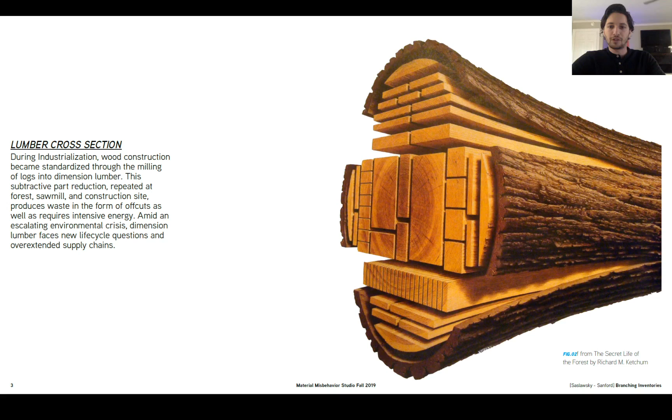During industrialization, wood construction became standardized through the milling of logs into dimensional lumber. This subtractive part reduction, repeated at forest, sawmill, and construction site, produces waste in the form of offcuts as well as requires intensive energy use. Amid an escalating environmental crisis, dimension lumber faces new life cycle questions and overextended supply chains.

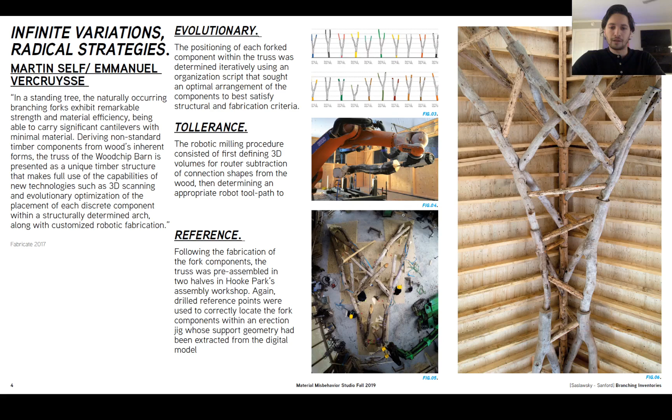The potential of computational imaging, 3D scanning, and fabricating non-standard timber have been both explored and demonstrated in built projects such as the AA Hooke Park over the last several years. Most of this work relies on elaborate and cost-prohibitive 3D scanning and robotic fabrication. This paper describes a democratized take on such approaches, developing a novel construction methodology which reimagines the utility of raw logs using computational feedback to place natural form in dialogue with design intent.

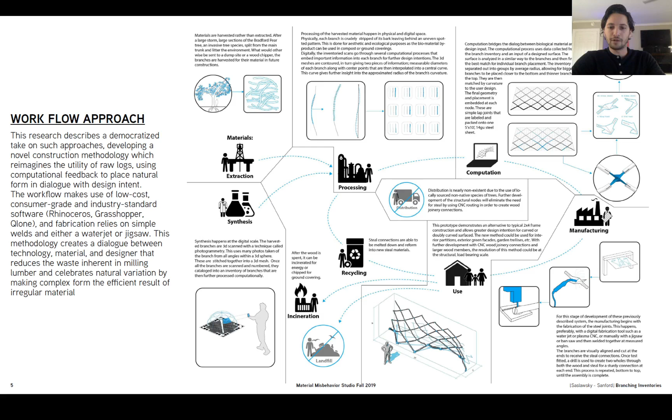Because material eccentricity informs design geometry, minimal part reduction must be performed, in turn decreasing construction energy and waste during harvesting, production, and on-site construction. The workflow is demonstrated through the construction of a full-scale structural prototype, a wall that is 25 feet in length and 9 feet in height.

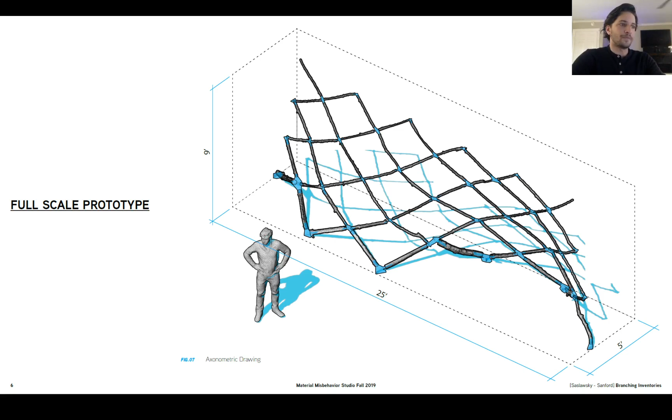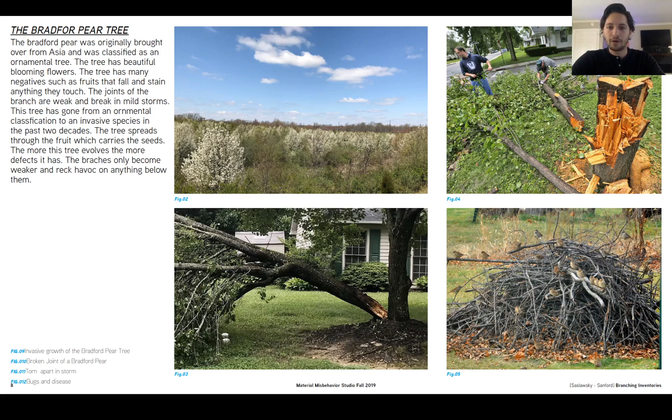Invasive plant species, specifically the Bradford pear, which is invasive to the region in which the research was performed, are explored as a natural material stream for construction, attempting to incentivize the removal of such species and in turn, the remediation of the environment at the regional scale. The Bradford pear, which was popularized in yards and parking lots due to its natural ornament and fast growth, is prone to losing branches due to its weak, acutely angled forks and numerous limbs originating from the same point. The built prototype collects and makes use of these fallen branches.

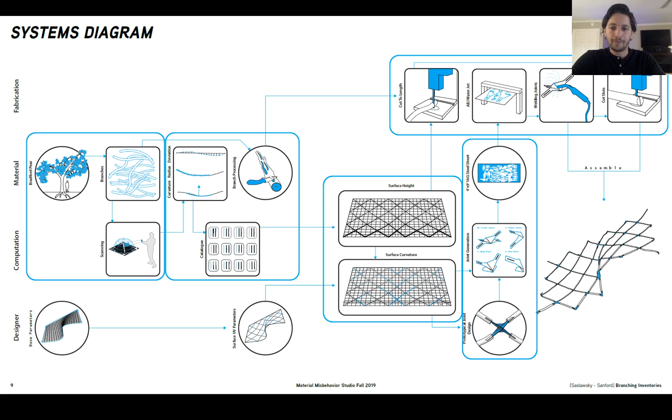Branching inventory develops a hybrid analog/digital workflow from which many types of structures can be designed and built, which will vary in form according to material input and design intent. Seen on this page is the systems diagram which mediates designer, material, computation, and physical fabrication. The methodology is described in 5 main steps: collection and scanning, inventory and analysis, branch and surface sorting, programming joints, and physical assembly.

To extract physical qualities from the irregular material which can inform a design, a reliable 3D scanning method was required. Several 3D scanning methods were tested, from consumer-grade smartphone apps to high-end industrial 3D scanning hardware and software. Ultimately, a user-friendly smartphone app, Qlone, was selected. Qlone is a photogrammetry scanning software that uses a printed calibration grid as the surface on which an object is scanned. The surface can be printed at any scale and isolates the digital model from all background material, meaning that no post-processing of the resulting digital mesh is required.

An augmented dome is viewable around the object as it is scanned to direct the user to views and angles yet to be photographed. The use of a smartphone app democratizes the approach, replacing 3D scanners, which retail for tens of thousands of dollars, with software that costs a few dollars.

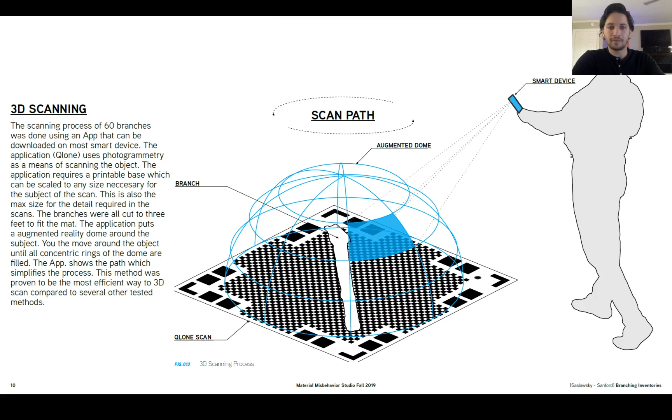This step of the process functions as the digital link between designer and material. First, the inventory is prepared for analysis with the goal of extracting specific understandings of the branch's inherent eccentricities, such that it can be used to the designer's advantage. The first operation performed on each 3D mesh was a simple contouring along the length of the branch that serves as a base for many other operations.

Connecting the centroids of these curves results in a crude interpolated curve representing the center line of the branch, a spatial delineation that can be further refined by interpolating circles over each contoured section, in effect smoothing out branches with small protruding geometries. The generated center lines are linked to each individual branch and stored in the corresponding place within the inventory. The interpolated circles also serve to measure and calculate the average circumference of each branch.

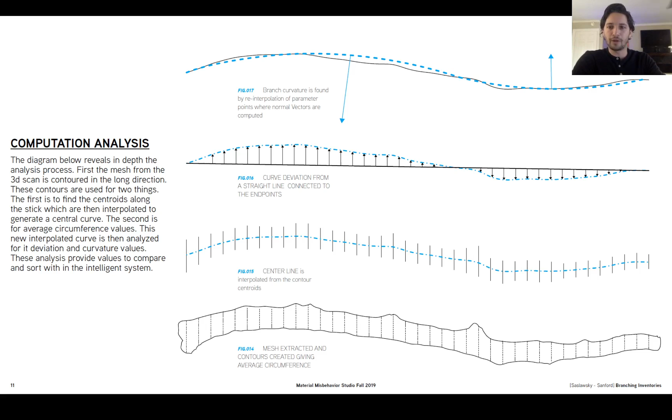Using the new inventory of centerline curves, a set of curvature values are determined for each branch. A circle is interpolated from 3 points on the curve, representing the average curvature of the branch.

Once all 60 branches are scanned and analyzed, they are numbered to match their physical identity, compiled into an organized grid on a single Rhinoceros file. The data extracted, curvature and average radius, is crucial to understand and determine how the irregular material can be used accurately in predictably modeling and fabricating a structure.

Having scanned and analyzed an inventory of branches, the next step is to correlate this material inventory with a designed form. The form was designed as a lofted surface between straight and undulating curve, resulting in a vertical wall-like structure that is serpentine at ground level and straight at its highest point. The designed mesh contains embedded information in each of its UV division curves that is similar to the information gathered in the branch inventory described previously.

Each mesh edge has a particular associated curvature and has its own z height relative to the ground. These two values are evaluated and inventoried on the surface, as done with the branches. These new mesh values are compared to the branch values in a best fit system. First, the branches are sorted by average circumference and assigned to an appropriate horizontal section of the mesh, according to the z height. Next, beginning with the most extreme curvature values, branches are matched to the mesh edge with the most similar curvature value.

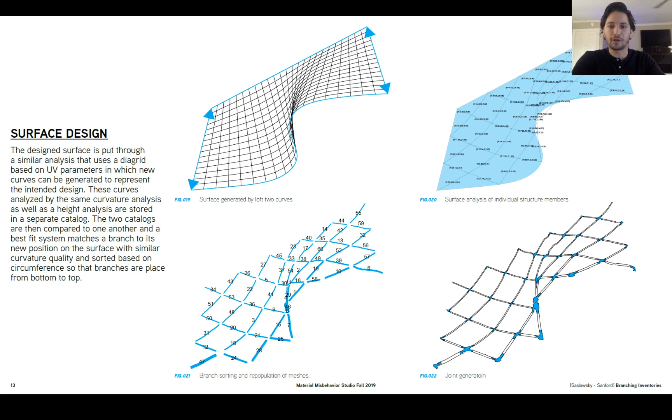After the branches are located across the surface, a joinery method is implemented to physically fabricate the structure, rather than relying on highly specific joints that must be scanned and machined into the ends of the branches. A joint system was developed that could connect the ends of the branches where they meet at the nodes of the surface. Multiple joint iterations were developed and tested, ranging in scale and complexity. Initially, joints anticipated the overlapping and capturing of branch ends, but this was deemed too visually clunky and complex.

Instead, the final joint design required the branches to terminate just short of the intersection, slotting into a node made of two intersecting pieces of steel, a thin joint that does not distract visually from the legibility of the best fit system. To model and fabricate the joints, two planar surfaces were generated using the points of intersection between 4 branches. 2 triangles are created to hold these surfaces together for welding accurate angles and to reinforce the joint.

Once the joint was adapted to the geometry of each node in the structure, they were cut from 16-gauge steel sheet and welded manually using the triangular alignment pieces. Joints at the edges of the assembly were generated with the same process with slight variation. The bottom joints connected to the ground were made with two metal plates folded and welded back to back, while the elbow joints on the ends and the top edges are simply bent to the correct angle to hold the edge pieces in place.

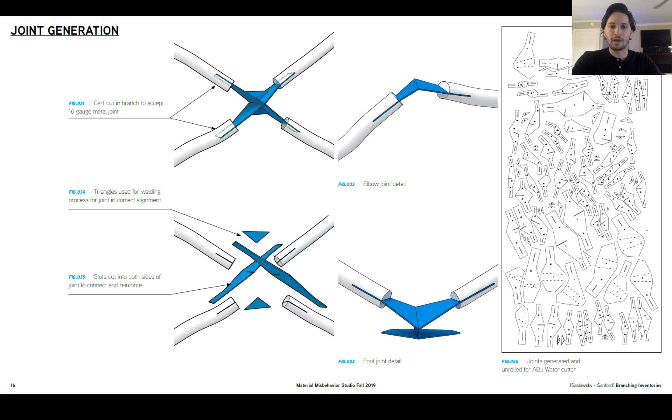Cutting the joints can be performed by either CNC water jet or a plasma cutter in a typical digital fabrication workflow, or in a more low-tech and democratized approach by using hand-printed paper templates and metal bandsaw or jigsaw. To attach the metal joints to the wood branches, 2.5-inch kerf cuts were made into the ends of each branch to accept the joint. With the metal joint inserted, 2 holes were drilled through both the branch and the joint, through which bolts hold the assembly together and prevent rotation.

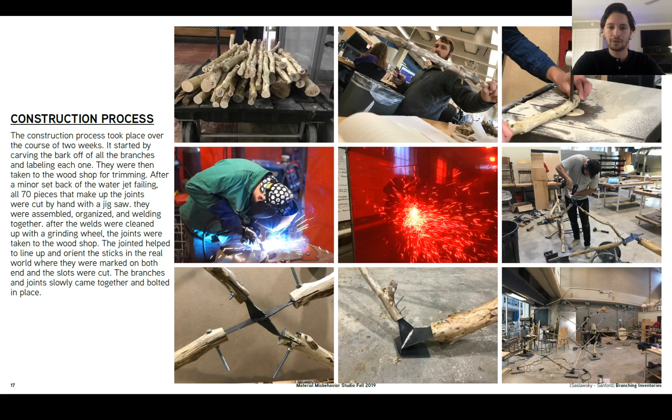The digital model was referenced visually to guide the correct orientation of the branches during the kerf cutting and the assembly. Once fastened, the programmed geometry of the joints accurately positioned the branches in the correct orientation within the overall assembly, meaning that the assembly was easily completed in its correct upright orientation by a team of 2 individuals, without the use of scaffolding or any large-scale alignment templates.

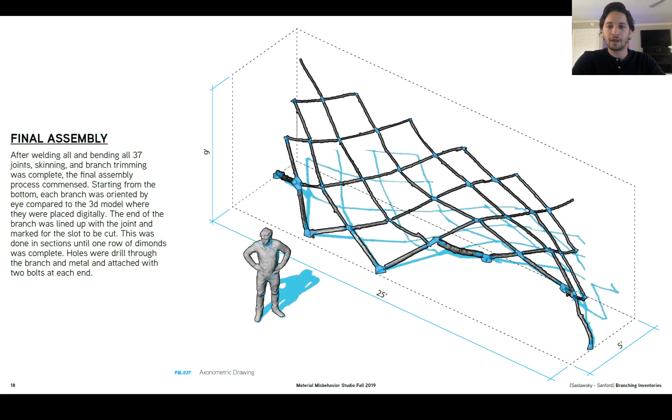This research contributes to a body of work that advances applications of irregular, non-standard materials in the production of architectural structures. Ideas around material agency and minimizing waste in digital fabrication processes resonate with Bandsaw Bands, a project in which the natural forms of a tree flitch generated a 3-dimensional topographic surface, while ideas about scanning and building with logs offer alternative approaches to the process developed for making use of these tree forks in Tree Fork Truss by Mollica and Self. Furthermore, techniques aimed at minimizing part reduction build on the approach developed to make use of concrete debris in Cyclopean Cannibalism by Clifford and McGee.

Branching Inventories contributes to this idea of scholarship by proposing and demonstrating the transformation of such methods to readily available democratized technologies. No prohibitively expensive or cumbersome scanning or robotic fabrication equipment is necessary. The approach is globally transferable, usable by anyone with a smartphone, laptop, Rhinoceros and Grasshopper, and a few basic manual woodworking and metalworking tools.

The project also advances an ecological narrative using material that is essentially landscape waste and would not otherwise be usable in architectural applications. Specifically, the use of material harvested from invasive species whose existence is typically a nuisance demonstrates the utilization of such material and incentivizes their removal and the subsequent remediation of the native ecosystems. Thank you for watching, and I hope you enjoy this research.